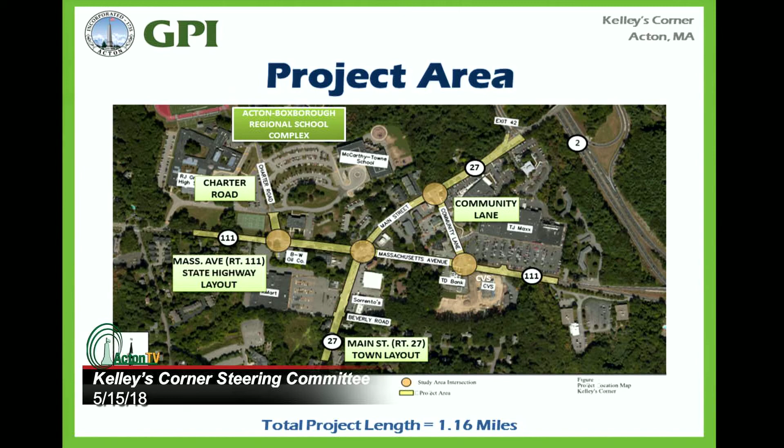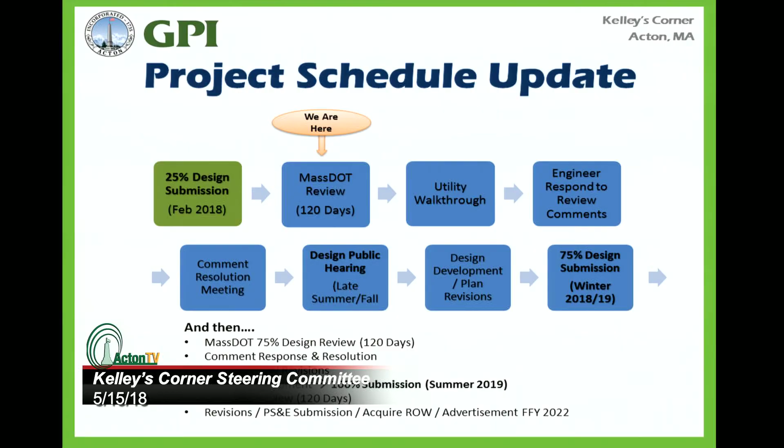Before we get into the plans, I want to touch briefly on the project schedule. We submitted the 25% design submission to Mass DOT and to the town in February. Because of the funding processes and Mass DOT involvement, we have to follow their process: after the 25%, a Mass DOT review, a utility walkthrough, and comment resolution and discussion of their comments. At that point they would allow a design public hearing, probably sometime in the fall of this year. We're currently at the Mass DOT review phase - they've had the plans for a few months and are reviewing them, and we'll get a stack of comments to address before the design proceeds further. Beyond that, it turns into the 75% submission, same process, then the 100% submission, same process. So we're very early in the Mass DOT process at the 25% design level here.

The goals of the project are to transition Kelley's Corner into a more walkable town center. There's a lot of commercial development, schools, and properties that bring folks to town. We're incorporating pedestrian and bicycle accommodations, now required with a lot of developments to have complete streets elements, allowing users of all ages and abilities to feel comfortable walking and biking. We're also providing ADA accessibility, which is important in a lot of areas - you really can't walk safely, and there aren't accessibility options for those with disabilities. We're also improving intersection and roadway safety and efficiently managing traffic volumes, since there's a lot of congestion and delays.

Other goals include providing access to businesses, since congestion makes it difficult, and for economic development that's one of the main goals. We're also looking at Charter Road and the schools accessed by it - safety is a concern there, including some sight distance issues we can talk about, as well as managing driveways and curb cuts, and promoting connectivity and walkability. So really a lot about complete streets elements, traffic management, and safety.

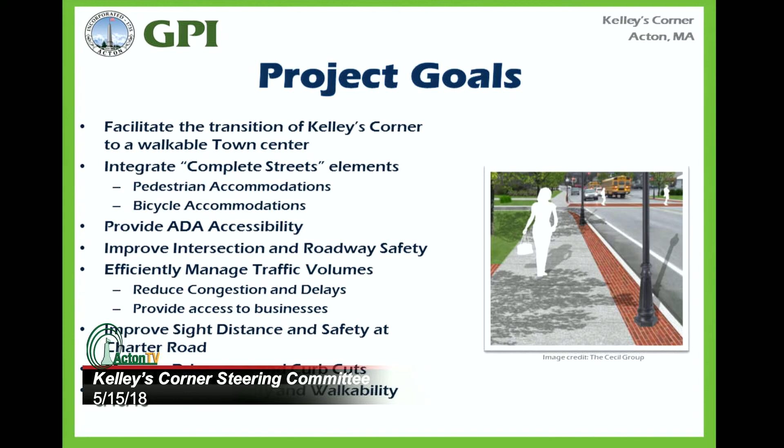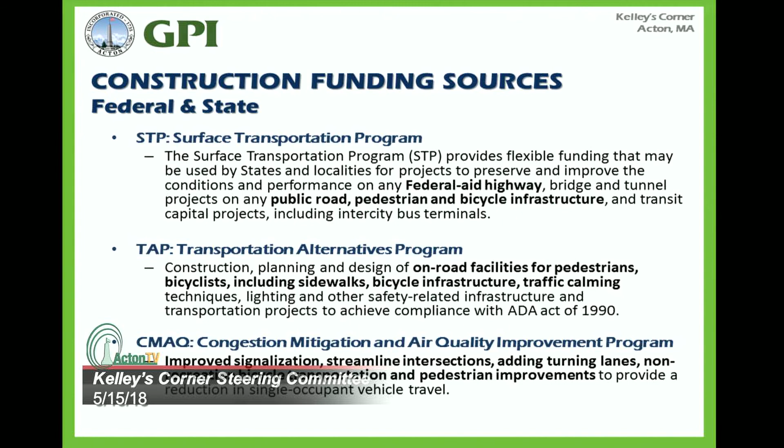Very quickly, there are federal and state funding sources that tie us to certain design requirements. We don't just pick things out of a hat and design with them. We have a lot of guidelines we have to go by, and a lot of them tie back to the funding sources. So a lot of this project's construction will be paid for by state and federal funding, and I've laid out a couple of those specific funding programs that are often tied to things like bicycles and pedestrians, or congestion mitigation and air quality, and improving intersections, streamlining them, adding turn lanes to reduce congestion.

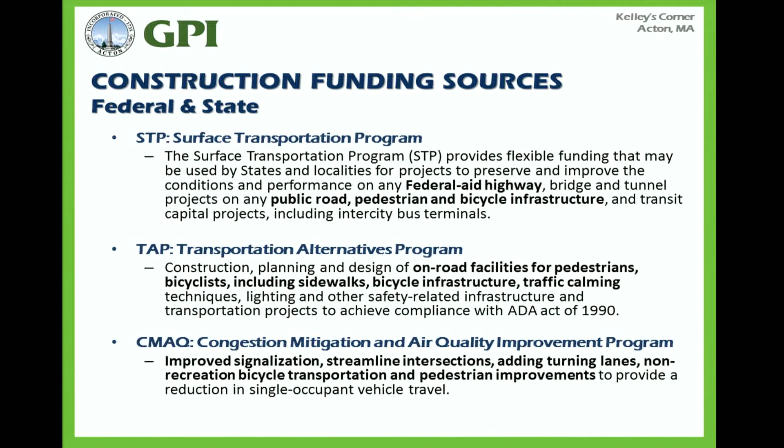To further talk about design standards and constraints, when we start these projects you have to look at what roadways you're designing for and do full traffic studies to come up with the design. You have an existing right-of-way width. Mass Ave is a state-owned highway, so you have the state highway layout that tells you the public right-of-way there. Main Street is a town layout, so you have a certain width there. Specifically, Main Street has a 50-foot existing right-of-way, and Mass Ave has a 60-foot.

Vehicle lane width, when you look at the type of roadway, this project comes down to a 12-foot minimum standard design requirement for Main Street, just because it's on a National Highway System corridor. But through this design process we've minimized that to an 11-foot, and for that you ask for a design exception. So we've minimized the vehicle lanes - they'll be 11-foot most consistently, 10-foot in areas where you can get away with that for turn lanes.

Shoulder width is something you have to think about. You have to provide shoulder for a variety of reasons - safety, maintenance, drainage, and things like that. But because you also have to provide bicycle accommodations, you can combine a shoulder and a bicycle lane, which is what we've done in this project, considered sort of the minimal impact, where a 5-foot shoulder off the roadway adjacent to your vehicle lanes will also act as a 5-foot bike lane.

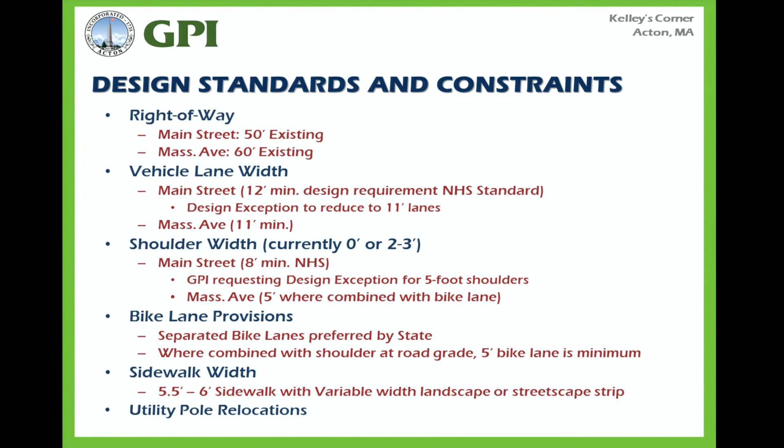Another pretty significant item is utility pole relocations. You have a lot of overhead wires and utilities, and along one side or the other of both roadways there will be quite a few utility pole relocations, because if we left them where they were they would either be in the new roadway or in the sidewalk. You just have to shift them either to the back of a sidewalk or within one of these buffers. So that's really the starting point of all the design elements in the project.

Overview of the improvements: the circles on the plan show you the intersections. The first one on the left is where Charter Road is, for the schools, and at that location the main improvement is that the intersection will be signalized and realigned. We can get into the details of those in just a bit. Main Street and Mass Ave will see capacity improvements and new signal equipment.

Mass Ave and Community Lane, which is the third dot on Mass Ave, will be signalized, as well as Main Street and Community Lane, which is sort of the top of the triangle there.

Project-wide, beyond the intersections, you have bike lanes and what are called bike boxes at intersections, pedestrian crosswalks, curb ramps, streetscape, all the things we just talked about. There are areas where we add left turn lanes so you can access businesses throughout either Main Street or Mass Ave, and signing, pavement markings, drainage and utility improvements project-wide.

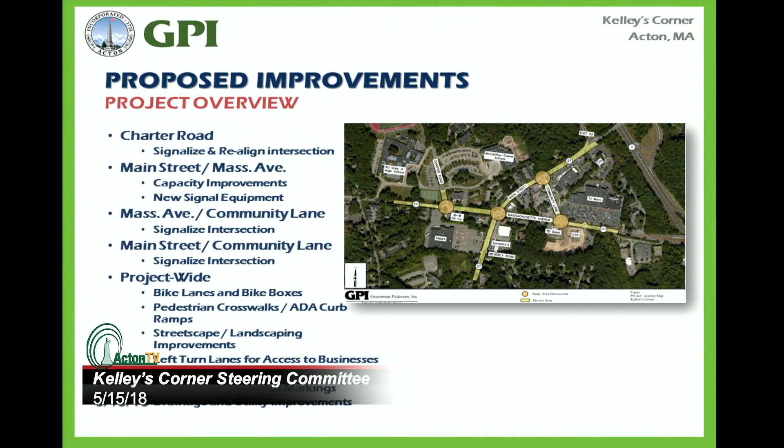So for some specific areas, I thought I would go into some of the challenges in the design and then what the proposed improvements are.

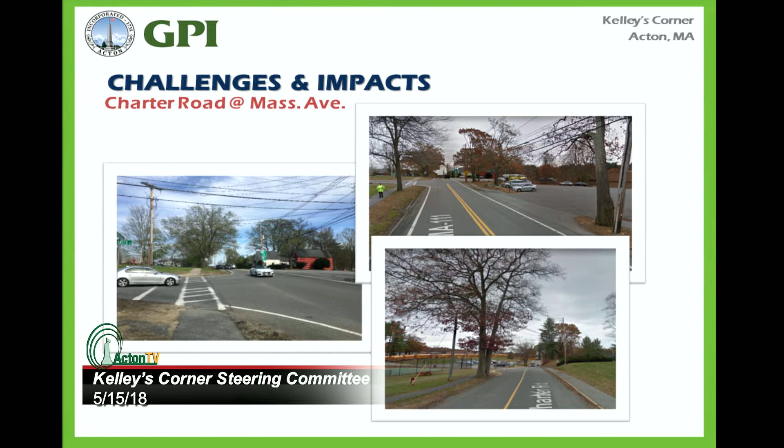Another thing to mention, this is actually looking down Charter Road toward the schools. There's really one lane in either direction currently. You have utilities, and you also have this tree just along the edge of the pavement today. The top photo shows how Charter Road meets Mass Ave, and you also have this driveway, the Kmart, whatever it may be in the future, that you want to consider when looking at improvements there. So those are some of the challenges when you look at Charter Road.

So this is an image of really the existing condition. The intersection is unsignalized today. The red lines here will show you the peak morning hour on a given day, based on the traffic study that's been developed.

The queues, this number is in feet. On each leg of the intersection you can see, it's obviously unsignalized here, so there's no queue. But the queue here is about 740 feet, and we've taken it as far as we can on the map. This is the existing condition, so peak hour, morning, this is really what you see for queues there.

Anything to add to that? Yeah, I'll just add one thing, John Diaz with GPI.

One of the other studies we worked on was the bus routing for the schools and moving the high school up, or moving it back. One of the biggest issues is getting the buses out of this property in the morning. If they're at the back of that 750-foot queue, it takes them a lot of time to get through that intersection. So the signal has that added benefit outside of this project. It also makes that movement a safe move both in and out, but also reduces that queue drastically.

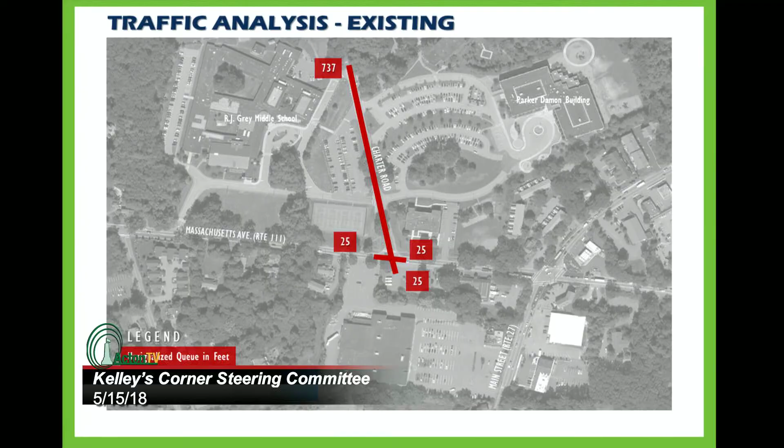So the proposed improvements, this is just a shot of the same plan. Just as a quick overview, the bright red lines you can see here are the existing edge of pavement. So when you look at these plans, that's the existing edge of roadway where the pavement ends today. The green you see is the bike lanes. The travel lanes aren't hatched or any color, they're just marked for the different lanes.

Pretty much everything, we're looking at realigning. You can see Charter Road today in its existing configuration, and we're looking at essentially shifting it to the west. That does a couple of things: it helps solve the sight distance issue, and the signalization also helps, because you're not trying to just beat the guy coming over the hill to get out. It also allows more separation from the Main Street Mass Ave intersection, to the east, and any queues that develop at that intersection.

Essentially, you are adding a southbound right turn lane from Charter onto Mass Ave. You have a through and a left on Charter. On Mass Ave, you have a left onto Charter, a through, and a right into this potential development driveway, which is at the edge of that property at the Kmart entrance today. In the westbound direction, you have a right and a through, and a left into the development.

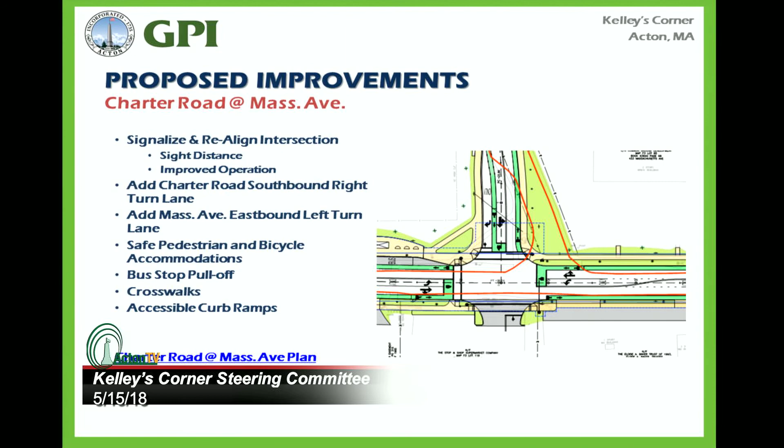This is looking at the proposed condition, what the traffic analysis looks like. So you can see a few things here. Now that it's signalized, you have the queues in both directions here and the queues on Charter. What you see is that the queues on Charter have gone down by half, 326, or 643 in the 95th percentile. You can see how the signal here impacts eastbound and westbound traffic on Mass Ave.

Just in terms of terminology, the 50th percentile queue is basically your average queue. The 95th percentile queue represents 95% of the time during that hour, so say 3 minutes, you're always going to have a queue less than that.

So instead of that 750-foot queue that we showed before with the unsignalized or stop-controlled approach, on average that queue drops down to about 320 feet. There will be a peak of about 4, 5, 6 minutes where it does extend up to 650 feet, but that will work down as opposed to constantly being there.

The other added benefit is the sight distance as you're pulling out looking left, but also if you're traveling east trying to make the left turn into the site, trying to see the traffic approach you over that grade is difficult. Pulling that back increases that sight line, and providing the left turn lane with the left turn signal into the school greatly improves that movement into the site.

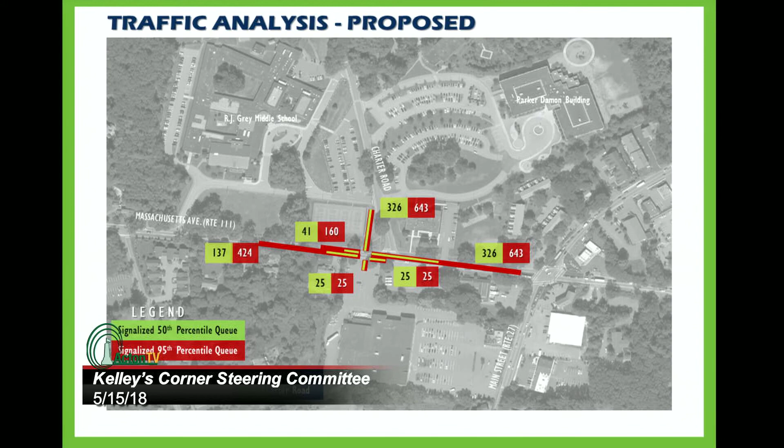Moving further down Mass Ave in the eastbound direction, I thought it was important to look at this length between Charter Road and the Main Street Mass Ave intersection for a few reasons. This picture shows looking toward the Main Street Mass Ave intersection in this direction. You can see the edge of pavement today, and there's about a foot, maybe, of shoulder beyond the vehicle lane.

From there, it slopes up pretty steeply at a 2-to-1 grade where you have an asphalt sidewalk on the hill, and then some vegetation and trees at the top of the hill before the fields back here. This is a challenge because if you can picture widening this at all, even just for a shoulder or a bike lane, you really end up cutting into that slope, which becomes a challenge for any growth there, which is a key issue.

We can look at the plans in just a minute. The other notable property is near the Baker Whitney house, near the Baker Oil Company. You'll see on our plans this is the constraint as far as where we can align the roadway. The proposed improvements essentially go right up to the edge of their front stoop. So that's somewhat of a controlling factor in this section of Mass Ave when you look at where the roadway is placed and if you can shift the alignment at all.

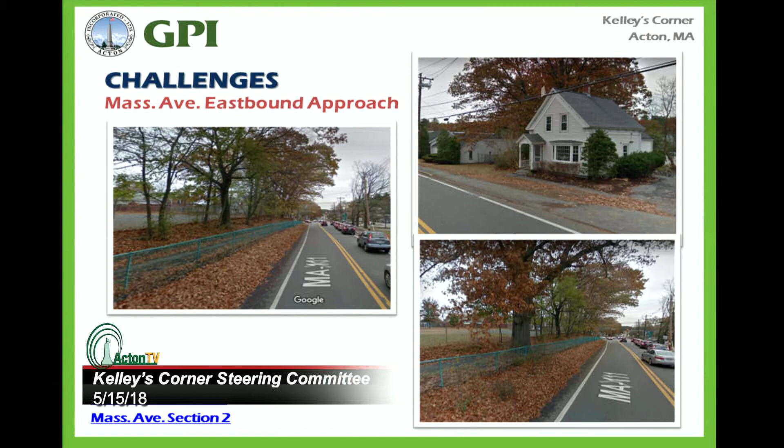So proposed improvements here: you're looking at 11-foot travel lanes, a 5-foot bike lane which is the same as the shoulder, and 5.5-foot pedestrian sidewalks. Before you get closer to the intersection, you have an 8-foot landscape buffer where we propose planting trees and lighting.

And on this side, you have a slightly narrowed section just because you're limited in the room you have on this side of the roadway.

Based on that picture of the tree and the slope you saw there, the widening here, this red is the edge of pavement, the widening to accommodate the shoulder and bike lane cuts into that slope, and therefore we do have a retaining wall along those fields, just past the old high school property.

We can show you a section of how that will look, but essentially the sidewalk and buffer areas are at the elevation of the roadway, and then a retaining wall is along the edge there. It's a bit taller than the existing one in some areas today just because of the slopes and grades of the roadway.

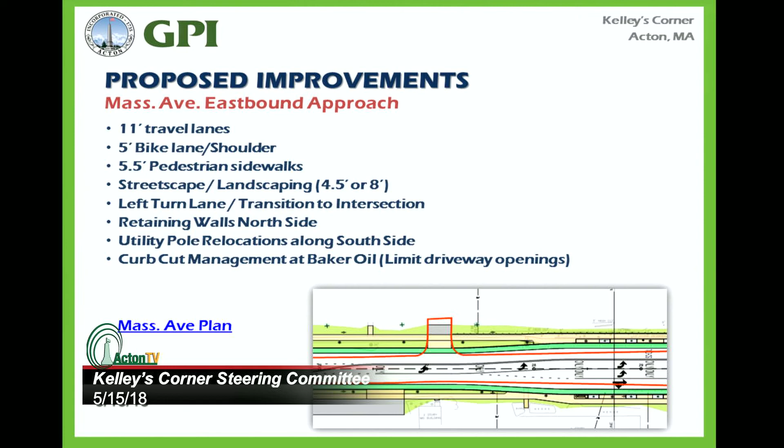The challenges here are the existing right-of-way. Mass Ave, the state layout, is about 60 feet wide. Town layout on Main Street is 50 feet wide. So when you're looking at adding shoulders, turn lanes, bike lanes, or sidewalks, we're really pushing on the existing right-of-way limits there. So you do have property encroachments and takings or easements in this area.

Another difficulty here is you have somewhat of a skewed intersection as it is. So in trying to minimize impacts to properties, or looking at where else you can align the intersection better to reduce impacts, you do have to struggle with the fact that you can't have through traffic or turning traffic approaching traffic in the opposite direction just by skewing that intersection.

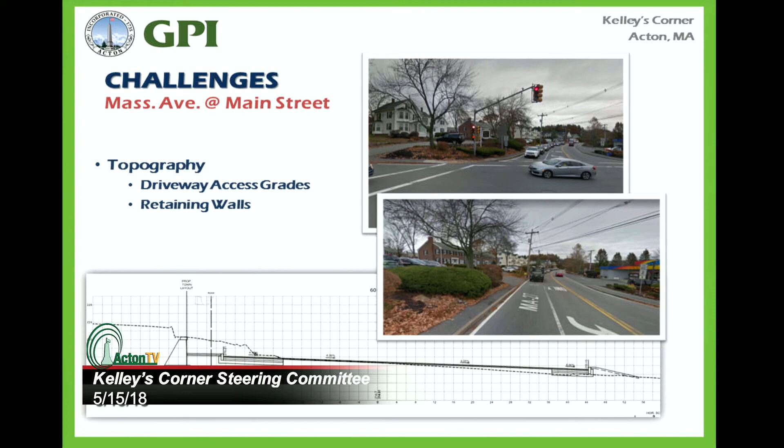This section shows you the proposed improvements, which is the roadway, and then you have sidewalk and a wall along this existing property. The alignment and roadway widening there essentially maxes out what you can do at this location and still achieve the grades to get up their driveway. So grades on all sides of this intersection were a challenge in laying out the proposed improvements.

So here is just a shot of the improvements. We can talk in more detail in a bit, but you do have capacity improvements. You have 2 left turn lanes on the eastbound approach of Mass Ave, and 2 receiving lanes at Main Street northbound. You have a left turn on Main Street northbound here, a left turn, a through lane, and a right and through lane. And then you have your eastbound left, straight through, and right turn lane here. So there are capacity improvements here in addition to the sidewalk and bike lane improvements you see, along with some widening and property impacts.

I'm gonna let you take over this one.

Thanks. I get the joy of talking about all the traffic and lane configurations at the main intersection, so bear with me.

So as Lindsay showed with this current configuration, the original design had a through and a dedicated right turn lane here. This is the heart of the whole area, and what happens here controls getting traffic through. What we were seeing was this eastbound approach was queuing up excessively, as was the northbound approach.

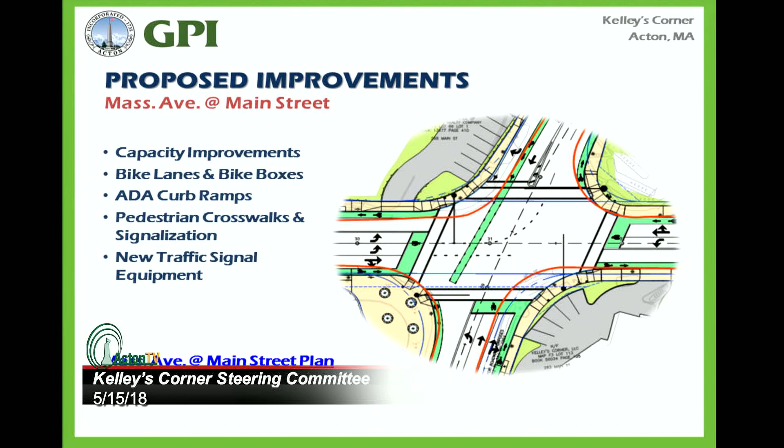And then scenario 3 was what happens if we did that and also took out the left lane, just did one left lane there. So those are the 3 options we looked at. This is currently proposed with the 2 lefts eastbound and the 3 lanes coming northbound.

So we're looking at, on average, a left turn queue of about 700... excuse me, 100 feet, with the 95th percentile queue of about just under 300, and about 500 feet maximum queue, and about 160 feet on average. So worst case, you're backing up to basically the current Charter Road. The new intersection would be over here a little more, so you're basically filling up that space.

This is the PM, the worst case. The other queues are pretty much standard here. You've got about a 300-foot queue, which is just beyond basically the access driveways here, so in that range. Southbound isn't too bad—it's almost to Community Lane, not quite. So that's where we are right now.

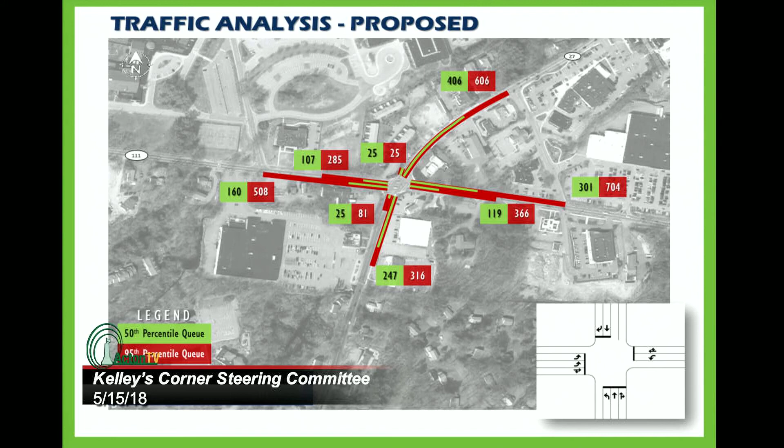So if we take this out, if we take that extra lane out, you can see what happens. Your queues here—not too much is happening up at the other three approaches. As you'd expect, we're not really impacting anything there. But your queue on the northbound approach goes up significantly, from about 700 on average to almost 1,000 feet. You can just visually see the impacts there.

This is the worst case in the evening right now. They're similar—we can do a graphic for the morning as well, but we just wanted to show the worst case right now.

So then going from 2 to 3, if we take out that left, what happens is that goes up even more. This looks a little strange, but it makes sense if you think about it: you've just got one single left turn lane, so that left lane now spills over. Your through lane actually gets a little smaller because you can't get to it—it's blocked by the spillover of the left turn vehicles. Also, you notice here what happens is that queue drops a little, which makes sense because we need more time to process this left, so this left can go longer. But more importantly, you start to see these queues back up dramatically along the main corridor as well as even further down on the northbound approach.

In terms of delay and some of the operational characteristics we look at: overall, that intersection as proposed with the double left and the double north, for lack of a better term, your average delay for the intersection is about 45 to 47 seconds. If you go to a single lane northbound, that goes up to 80. And if you take the left as well, you're up to about 140 seconds. So a pretty significant difference in operations.

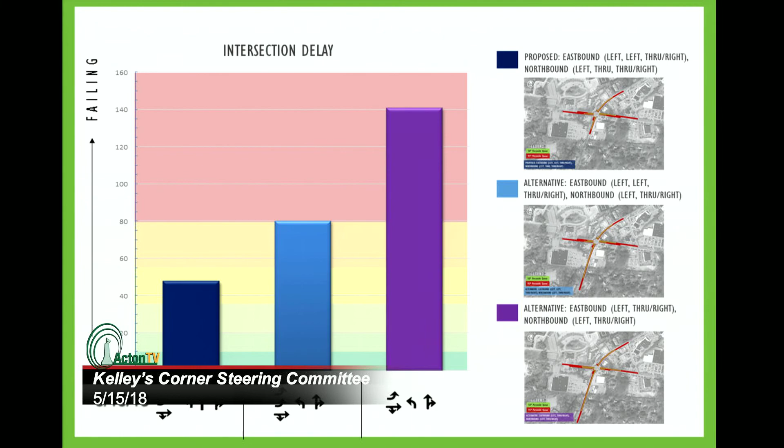Being someone who's gone through Kelley's Corner many times through my 19 years of living here in Acton, I've noticed that school traffic has a really profound impact on the queue-ups and delays at that light. Has that been included in your modeling?

Yes. Okay, yes—so could you share that? Because I have a very good traffic consultant with TEC that... We're happy to share whatever analysis you want.

Yeah, thank you. And just so you know, these three signals will all be part of a coordinated system, most likely a step above that—either a peer-to-peer or adaptive system. So particularly in the morning, to address that concern, we can design the system essentially to flush that traffic from the school out and through the intersection.

In terms of another criteria we look at: volume to capacity, which is basically you have a certain capacity for the lane. If you have more volume than capacity, that's a bad thing, so over 1 is bad. With the first option, the double lefts and double north, we're beneath 1—about 0.8 overall for the intersection. That goes up if we take the northbound to just about capacity, meaning on average the intersection is at capacity. If we take the eastbound, we throw that intersection over capacity.

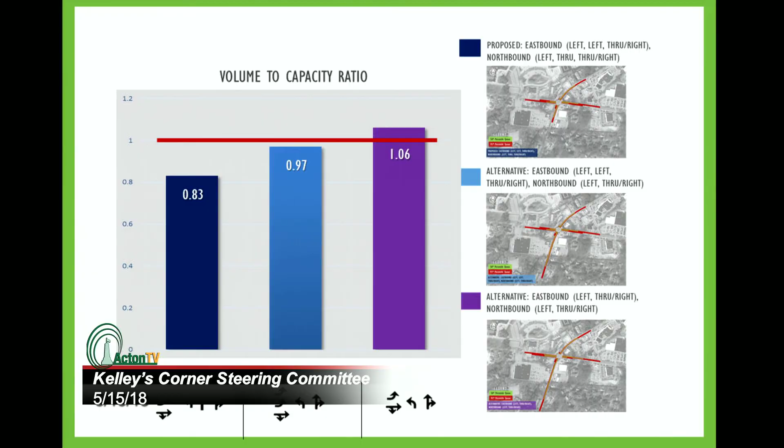The volume you're talking about here, is that current or projected outward? This is projected out at 20 years, and that's standard—this is a state project. When we go through the process, we have to look at traffic projections through the future, and it's pretty minimal growth out here; we're using only 0.5% per year, so over 20 years it's about 11% growth. We've looked at the volumes—they're consistently going up in the area. We saw a decrease obviously in 2007, 2008 when the economy tanked.

But we're seeing the traffic levels since then, they're coming back up, and they're beyond the levels they were back in before the crash in 2008. So we're seeing that trend go up.

And again, one of the things we have to look at is, it's an investment, so Mass DOT is coming in and funding this. They want to make sure that what they're building is going to work for some period of time. So this is an improvement. These are changes that are going to be in place for a significant amount of time, and you're not going to have a chance to build it and then come back and say, oh, it doesn't work, we want to build it again next year. So we want to make sure we're addressing the things. We don't want to go overboard, obviously, but we want to be conservative when we do build it.

Just back to you, right?

Okay, so one other area we wanted to touch on is north of Community Lane, Main Street northbound. You can see the Hosmer House here. In that general area, a section there we thought was important to show just because of the historic property there. You have a lot of utility pole relocations, you have some topography to deal with, and you have a lot of businesses where you need to get in and out.

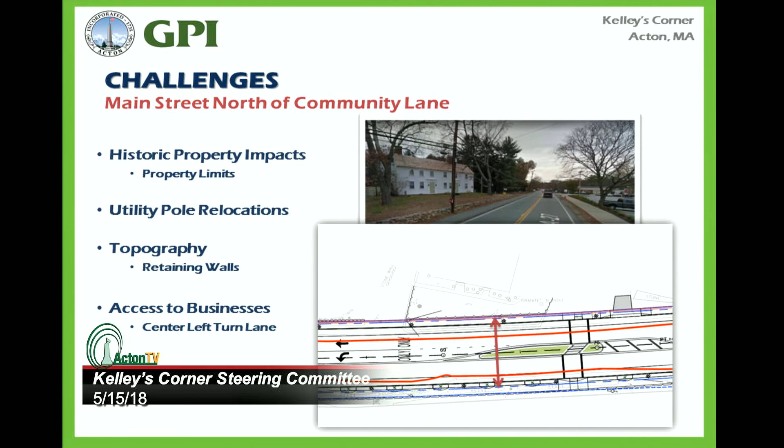I somewhat just went through that. This is the proposed improvements in that location just discussed.

Is that a traffic island? This is an island here, yes. And what you don't see, this left turn lane is what approaches Community Lane. So that will be your left onto Community Lane. And then here, this is the entrance that will be the Dunkin' Donuts entrance. So you have a left turn lane that ends right here to go onto Dunkin' Donuts. So this is essentially the shadowed left for this left turn lane and that left turn lane.

There's an area around there that the kids actually cross. There's nowhere near a crosswalk. Is that where you're putting this? Correct. No, the kids come off that utility easement right somewhere over here. There's a signalized intersection at Community Lane and Main Street here that ideally we would like to have the students walk back to and cross safely, because they're probably going to Dunkin' Donuts or something like that in this location. So they would be coming out here and crossing at this location, which is quite close to that Community Lane signalized intersection. So they would have to walk a bit further.

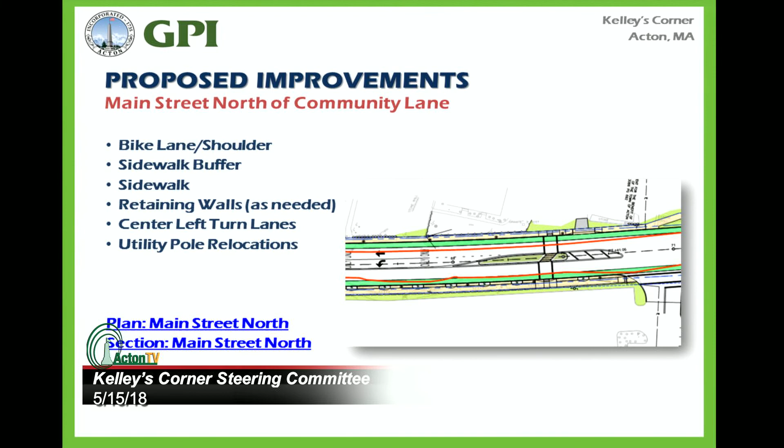We wouldn't be able to add a crosswalk right at that location just because of the distance. But the 25% design does show a crosswalk here. We haven't received comments back. It may be that they don't suggest a crosswalk at that location, just given the traffic and the signal here and the Route 2 ramp coming off here. So that's something that we looked at, and that is in the plans now, but it may be something that's up for discussion depending. We know they do cross here, and they may still do that when this is developed, but they do have the ability to go to the signalized crossing at Community Lane.

So that really wraps up the overview of some of these project areas. We can talk in more detail for certain questions, but really the next steps in the process would be receiving those review comments from Mass DOT, all the department divisions there.

Also the town, we've received some comments since the town received the plans. We then have to go on a utility site walk to talk about all the utility pole relocations, the underground utilities that are impacted, involving all the utility companies as well as Mass DOT and town. Then we have a comment resolution meeting with Mass DOT. This all takes a little bit of time, and then you get to the public hearing part.

Oftentimes there are changes that happen after the public hearing, and changes that happen before the public hearing based on comments and certain things that need to be changed before you go to public hearing. But that will all be worked out in the next few months, and I would anticipate that around fall 2018. After that, it's public comments and then getting the approval to go to 75% if that's what happens.

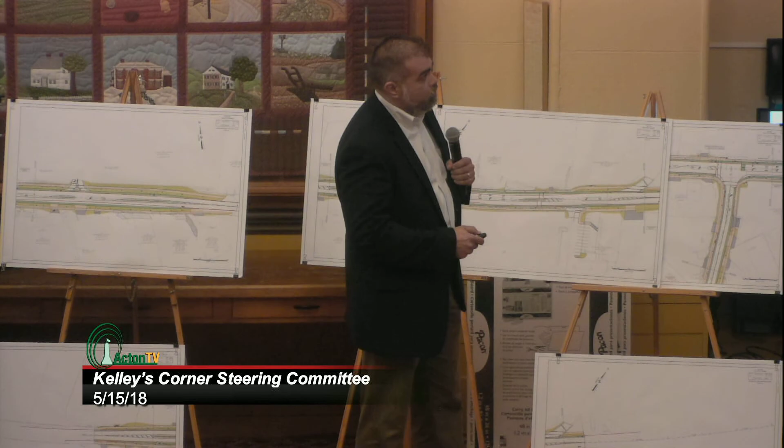So what you're seeing here, really at the intersection, the only widening we're doing is to provide the bike lanes. This is now the new proposed curb, this is currently the edge of road, and this is your 5-foot bike lane. So at the intersection, that's what we're doing—just widening to provide the bike lane.

So 10 feet. Now, in terms of the crossings, the signals are timed for the pedestrian crossing. They're timed for a walking speed of 3.5 feet per second, which is a pretty slow walking speed. That's built into the signal operations so that you have time to cross the entire distance, from getting off one sidewalk or ramp to getting on the other. So that's designed into the system to accommodate that.

There's also technology out there where you can have a button that normally times for a 4 foot per second walking speed, and if you hold it longer, it will give you longer to cross. But generally we have to time it for 3.5, which is already—we used to do 4 feet per second, and now we're doing 3.5.

The clearances are also—we used to just clear, the thought would be, and for those not familiar with how a pedestrian signal works, you can be in the intersection when it's flashing. When it's flashing, don't walk. The 7 seconds is to get you off of the curb. The time in the flashing is actually the time needed to cross from curb to curb. So we always hear we only get 7 seconds.

Hey, John, I just want to point out that a lot of the people that will be crossing aren't going to get the little tutorial that you just gave us. Also, a lot of these kids are my age, my son's age kids—elementary school, junior high school kids. There's a huge population of kids across kitty corner to the Bueno Y Sano and Sorrento's Pizza and all that. There's a huge draw of kids. If you ever go into that intersection on a given school day, you'll see rows of kids coming in. And they don't have the common sense that the adults do.

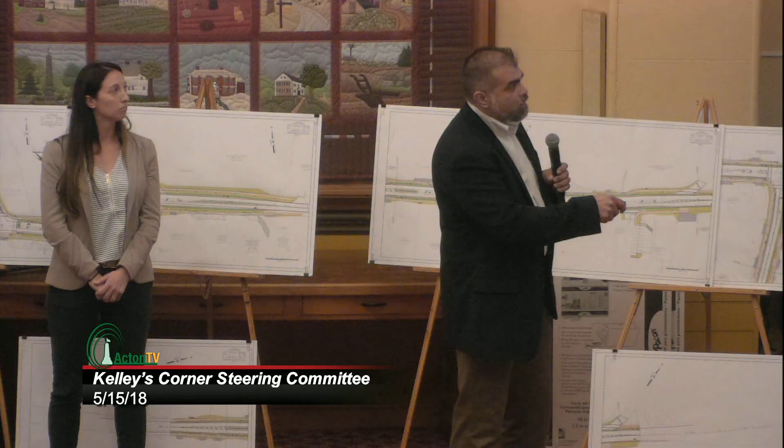Right now, I'm not looking at the future condition. Right now, you go out there, the edge of road is here, the edge of road is here. There is no accommodation for bikes there. If you were to add a bike lane on either side, you would still have to widen that road.

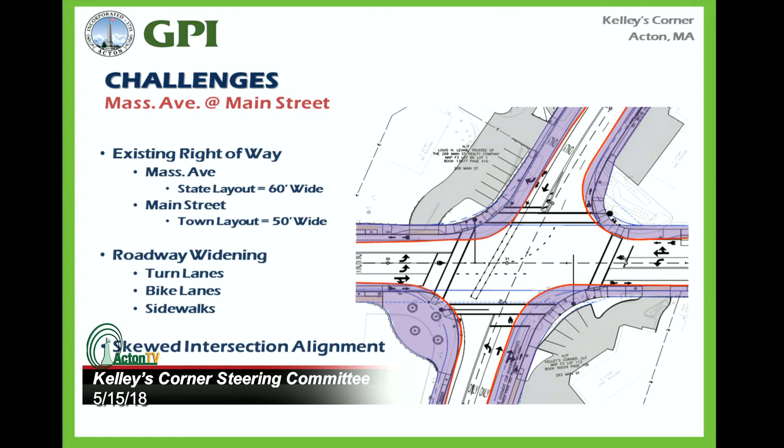If you took out the turning lane, you'd have room for the bike lanes. If I took out the existing turning lane? No, you took out one of those extra two turning lanes. You could take out one of those turning lanes. This is existing pavement. I give up. Anyway, this is existing edge of pavement.

Maybe we're not speaking the same language. The existing road is physically there. We're restriping it. The width of that road is the same. Restripe it first with a bike lane and then you won't have room for an extra turning lane.

I'm saying make the priority be the bikeable person and not the fast traffic person. If we just put bike lanes in with what's there, we would be taking existing lanes away from what's there now. No, there's only one turning lane there, sir. I understand. There is one turning lane there, and that is where the edge of road is.

If we are adding 10 feet to the road to put a 5-foot shoulder on either side, we will have to widen the existing pavement that's there. I'm saying don't put in the second turn lane. I'm not putting in the second turn lane. Well, with one turn lane, with what is there now, to provide a bike lane on either side, we would have to widen 10 feet.

But you can use the turning lane instead. The existing lanes that are out there, one eastbound, one westbound, and one turn lane, is what the pavement width is. If we were to provide bike lanes, we would need an additional 10 feet to maintain a single left turn lane. I have the same confusion she does.

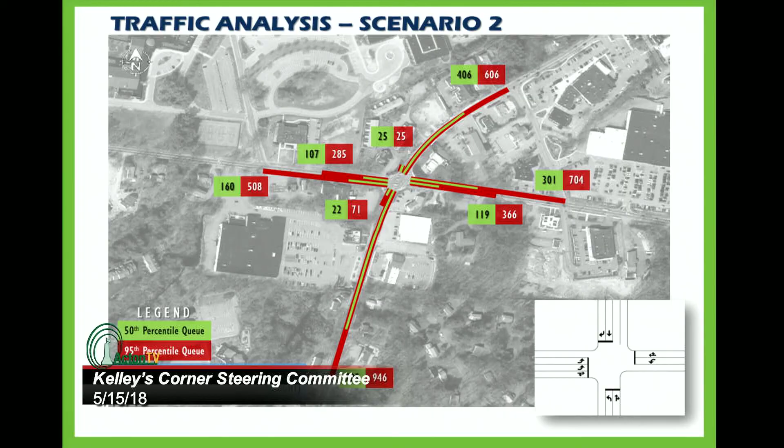I think the reason I'm asking is because a lot of us are going for a low-fi Kelley's Corner, not, as you say, managing the traffic volume or getting more efficient with it. To me, that's not a concern at all. I live in Acton, I don't go through Kelley's Corner at certain times of day, and that's just a reality. I don't want to give up my town to make the state happy with its economic development plans or to facilitate commuters, frankly. I think it's a safety issue, and we have larger, more important issues than moving traffic. But I've already said that, and I'll let other people speak.

There we go, okay. Oh, wait. Ready? Okay, hi, no, that's all right.

Danny Factor. I'm a member of the Commission on Disabilities, but I'm speaking as a private citizen. I want to make a comment and then ask a question completely unrelated to disability issues. At the Commission on Disabilities, we represent people with all sorts of physical and mental disabilities, people who use wheelchairs, but also many who don't, who have other mobility issues. They may have lung issues or leg issues, and while they are walkers, they still have challenges walking.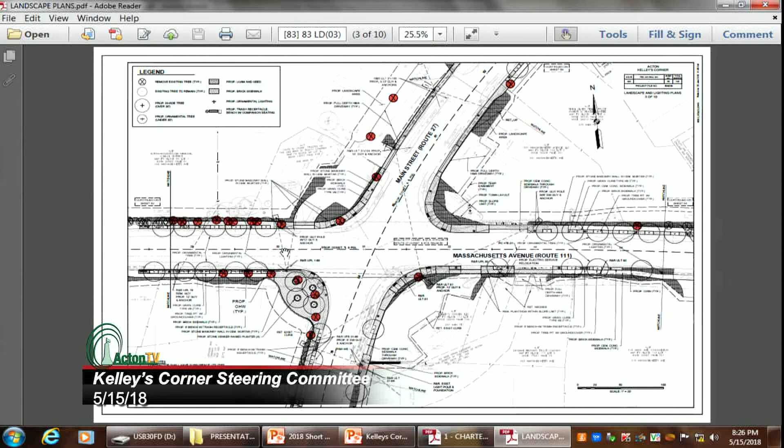In this location, it's due to the slopes. I can show you a section with the widening, the sidewalk, and then a retaining wall. Ultimately, it's not the final footprint of the retaining wall that makes the trees have to be removed, but the construction process and excavation that will probably undermine a lot of those trees, given the way they sit on that slope right now.

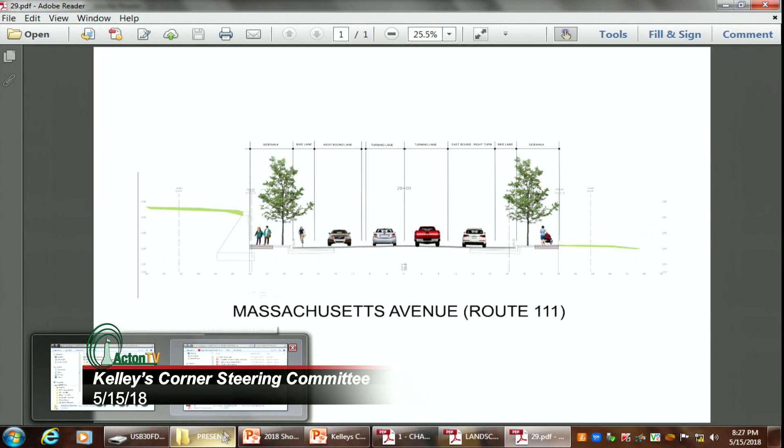Some of them may not live through the construction process anyway, just because of the condition they're in or where they're at right now. This section shows the retaining wall on the left side, higher than the sidewalk. That's the location where construction of the wall and the widening will result in the loss of trees there. I can try to look at a number, but it won't vary greatly since it's the depth of excavation needed for that wall in either situation.

I was going to ask unrelated questions and mention trees, but it seems there are tree people who want to talk about trees, so I'll let them go first. Thanks.

I am accurately called a tree person. I absolutely adore, live for large historic trees.

I wanted to ask if we can all have these slides, because a lot of the stuff online is really hard to see. You said you have slides showing which trees are removed in red, including down that way. So is there a way to actually get that? I can provide everything to the steering committee.

Just to state an opinion, I would like to figure out a way. I'm not going to get into traffic engineering ever in my life, so thank you. I do want to say I think it's great that you're going to put in lights and do something about safety around the schools and buses getting out at that intersection. There's clearly some real safety coming with the traffic lights and other things, but otherwise I'm going to stay out of that whole situation. But I really, really hope we can figure out how to save the character of the area.